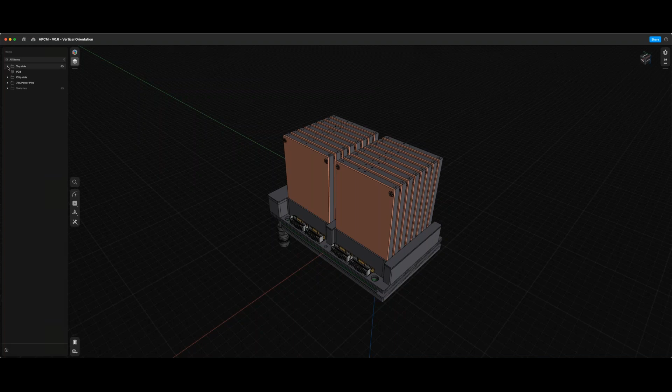So let me just make sure everybody can see this. You can see the model pretty much looks the same, with a couple of highlights on what we've done differently. We decided to increase the spacing between the drives, so we had a little bit more of a wall for the cooling, for the conduction cooled attachment of the drives to the water flow. So the module is now 118 millimeters wide, whereas it was 102.

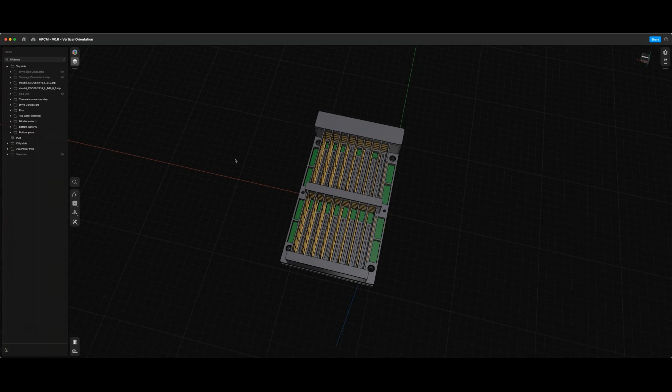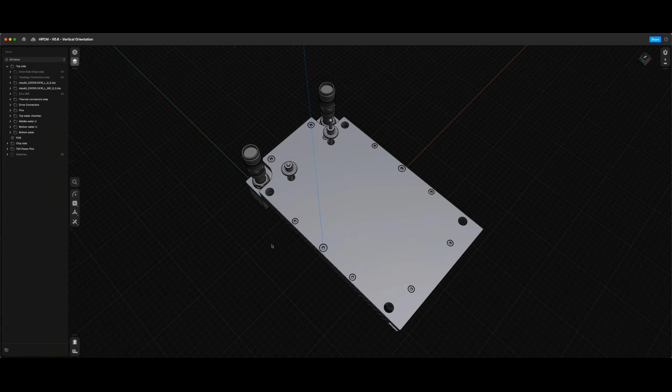The other key highlight, rotating around to the back side or component side, you can see that we've gone from 2 water inlets and 2 water outlets to just 1 inlet and 1 outlet. We've gone to the larger diameter Stäubli connectors, so we've actually got more area than the 2. We just took the decision to do that. Now what we've done is we've repositioned the power connectors to bring in the 48 volts. So all of this is still blind mate, and that's pretty much it.

We've completely designed the water flow for the entire module. This design has been geared up towards the work we were discussing with the research group from the University of Illinois, where they've done conformal coated copper on top of the module. We're going to investigate that with them, building a little research demo. And with Progress Analog, I don't think Roger's on today, but we're going to build the load slammer—a thermal test module based on the Xilinx VP1902.

We're also trying to involve UCLA and borrow one of their load slammer pieces of silicon. They can actually slam 1.5 amps per millimeter squared. So we can do the load slammer Progress Analog's traditional way with discrete power CMOS devices, but we're also looking at maybe trying to leverage some IP and devices from UCLA if possible. So that's the basics. The lid we've got here, designed for the conformal coating, could be modified for the more traditional thermal grease attached copper water cooled lids as well, but we'd have to redesign the lid. So we've based it on the assumption of a conformal coated board at the moment.

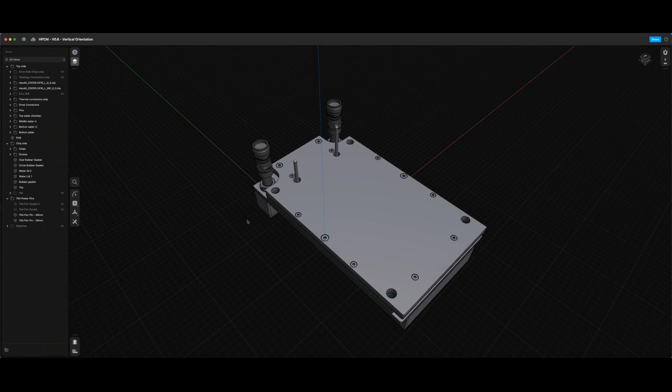Maybe Ben, would you like to just talk us through the water flow? Sort of coming in, going down the drives and up through. Just walk us through the flow. Yeah, for sure, I can do that.

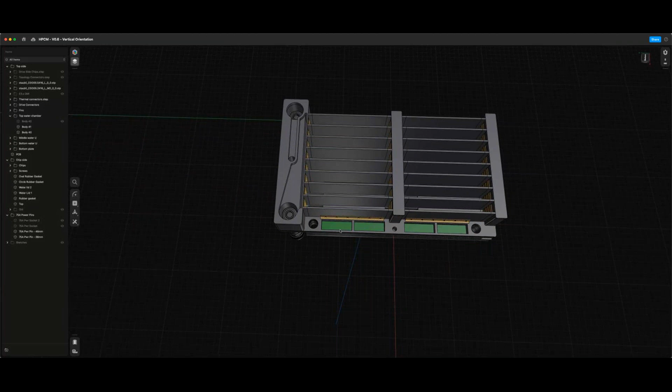So we start coming into this top chamber here on this left Stäubli, and I'll just pop open the top layers so you can see how it comes in. As it travels around, we've got these sort of raised areas. You see how the water comes down in between each drive, flowing between these three different pillars.

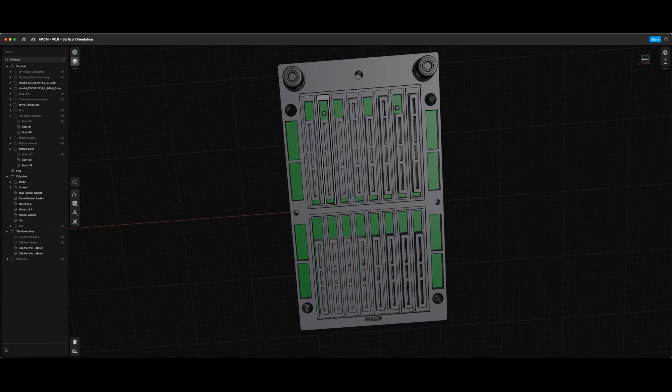With all 3 pillars on, we'll see that it comes down the sides of these walls, cooling the sides of the drives as it comes up, and then back up this area here, down the sides, and then back up again. I'll just pop these open so you can see inside.

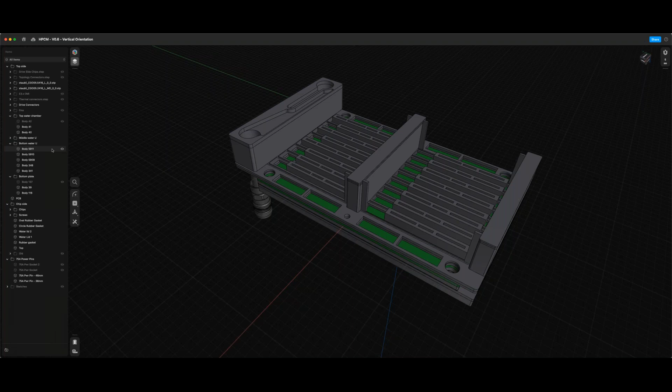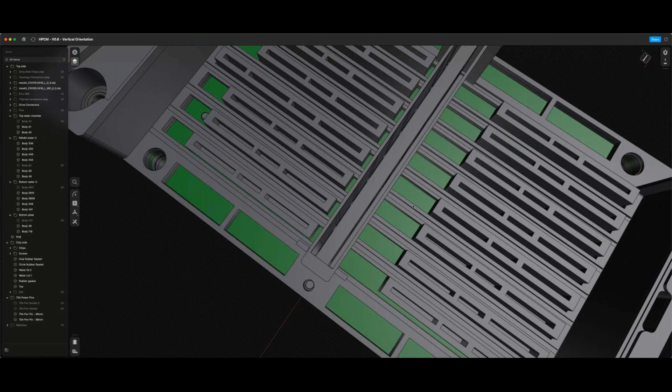So as you see, the water comes down through the Stolby, down here, and through the sides. After it makes its way through here, it comes down this center hole, slides around the PCB, and into our lower chamber.

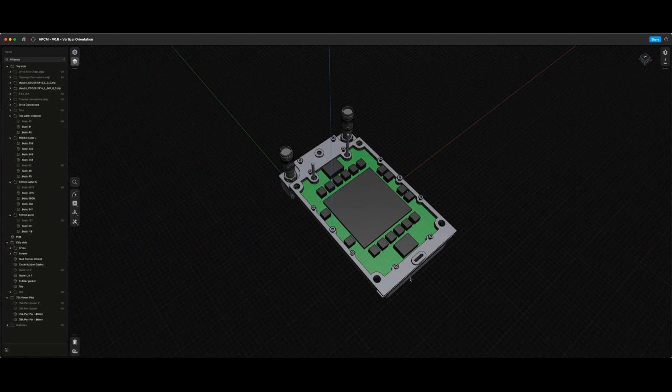Now I'll pop this bottom lid open, and we can see it comes to a full open sheet. Maybe it's easier if I show this. Sorry.

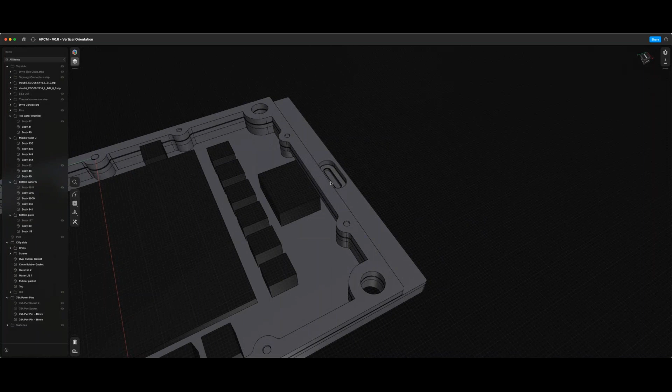I'll just remove everything and watch this plate from the other side. You can see the water comes in through this bottom chamber, through the pipe from the other side, and over all of the compound coating that my dad was talking about, then comes back up through the same hole in the side here to the other side and back to where the previous Stolbys were on the top side piece, coming up through here and through this exit Stolby.

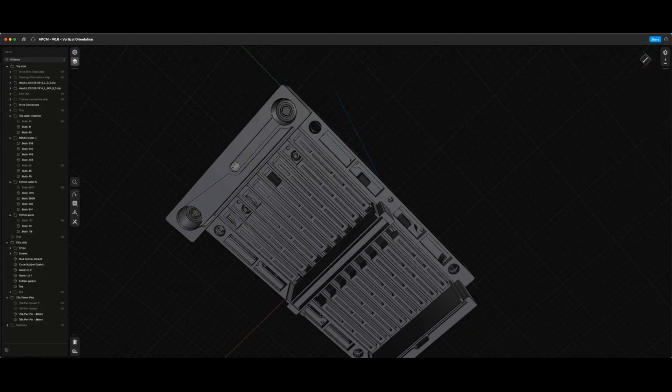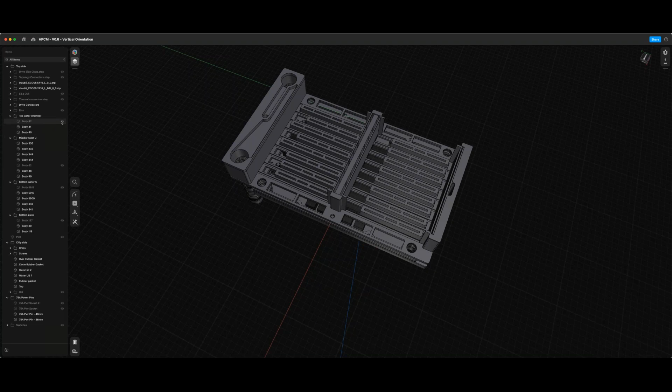Hi Ben, this is Munir. Is the water circulating? Is it an enclosed container or something? How are we avoiding water spilling out? Well, on this one, this is one solid block, so the manufacturability of this is going to be a big question.

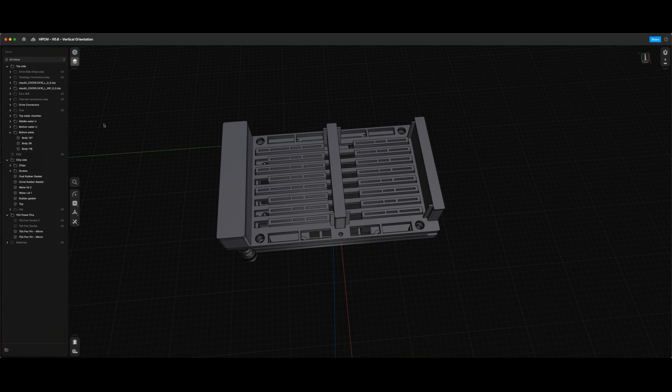So we've got the fundamental design, and we're just going to be reviewing that with one of my mechanical friends on the manufacturability. But I will talk about a company, a little startup called Fabricate that does 3D printing of heat sinks. I don't know if this is viable to be 3D printed. I know people have been concerned that 3D printing isn't a good way here.

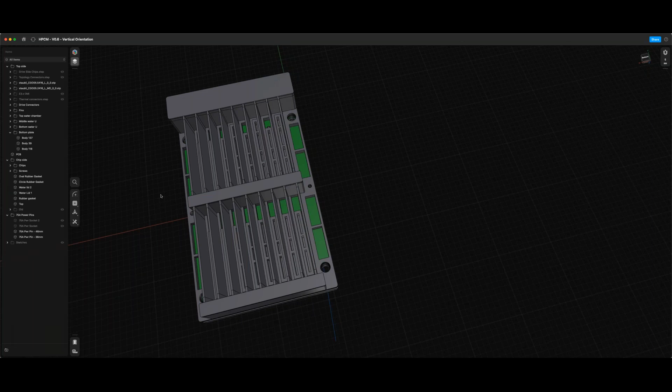But basically, there is a manufacturability question. We've tried to think about it, but this would be an enclosed unit on this side. And then Ben, just flip it over and show the connections. So these Stäubli connectors are blind mate, non-drip blind mate connectors, but the flow between the two modules.

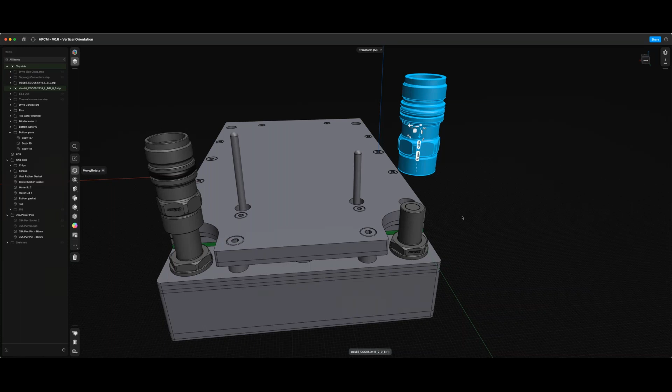So if you get rid of the top at the moment, Ben. This piece? Yeah, the entire top. The entire top. Wrong way around. Oh, okay.

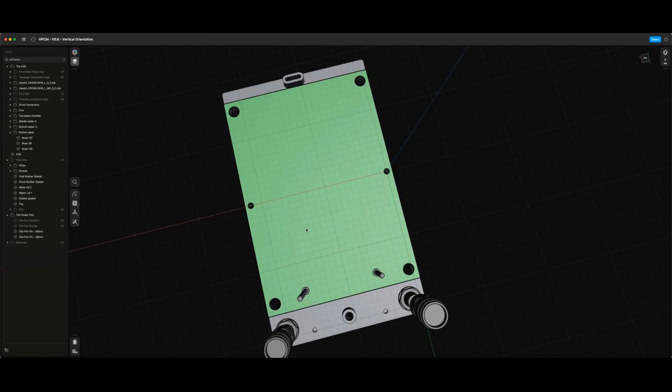Yeah, so what you can see, the water comes up to the module. So there's a rubber seal there as it mates and gets clamped to the top lid, and similarly a rubber seal on the other side. And then the top lid itself, if you do the main stiffening bar around the board first, Ben, before your rubber gasket. Yes.

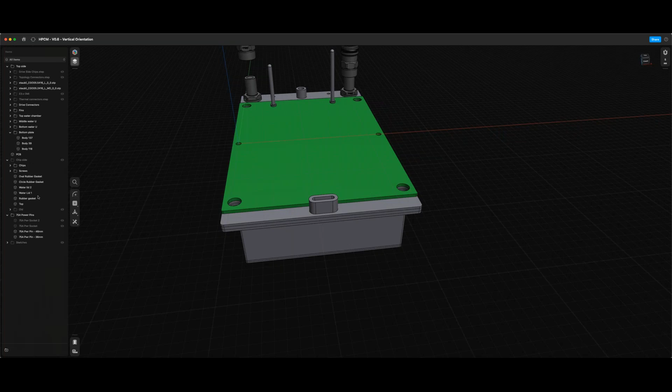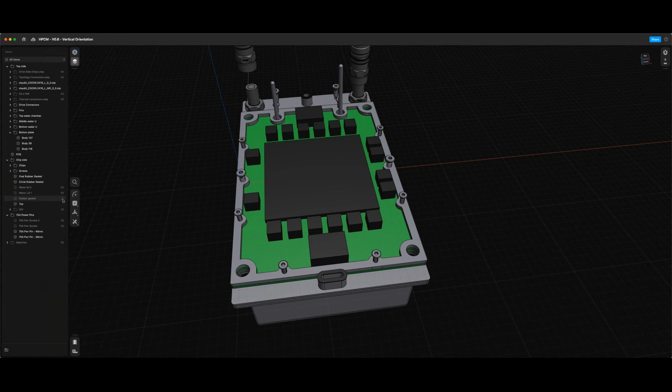So no problem, there we go. So I envisage that this will actually be attached and somehow sealed to the board, either epoxied or glued to the board, this stiffening frame, so that it's actually watertight. And then there's a rubber seal that goes on top of this, right, Ben? Yes, yeah, you should show that. Gaskets, yeah. And then a rubber gasket, and then there's a lid, and then all that gets clamped.

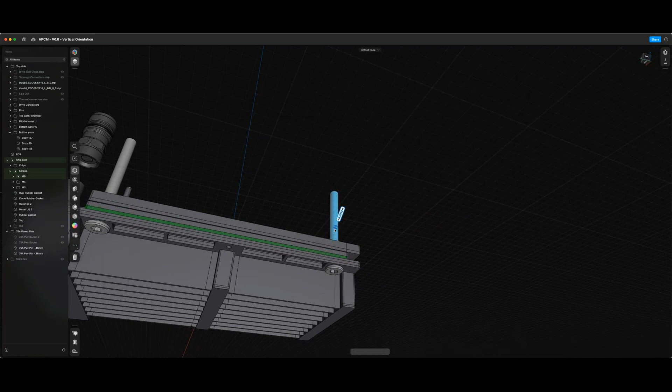And actually, you haven't shown the big corner clamp screws yet, so show the big corner clamp. Yeah, I can turn those on. It bolts these two pieces together effectively. So this bolts the two pieces together, and also this, you can see, they're long. There we go, they're long.

So these are also the primary guideposts to the wall, and we're going to start working on the wall design now. So these will be the guideposts into the wall, and there will be a hole all the way through these pillars so that we can actually screw it to the wall. It'll be a blind mate slide in, so it will sort of sit on the wall very nicely and simply, but the screws will just be there to hold the module in place on the wall after it's been mated.

Does that answer your question, Minner? Yeah, I think there are a couple of things that you may want to consider. Obviously, with 3D printing, we want thermally efficient material, right? So plastic may not work here. So you want some kind of material, aluminum, copper.

And the second thing that I have is in the design, because most of the heat, you're going to efficiently cool the connectors and all those things, right? But on the top side of the CPU and other things, it still needs to be addressed because that's what's going to generate the most heat, right? You want some kind of channels there, which essentially today we do.

Yeah, so yeah, absolutely. In terms of this conformal coating approach, it's research work that's been done at the University of Chicago, Illinois. Obviously, you can put a normal design. We could redesign this lid to be a normal type water chamber, which is thermal grease mounted onto the main device and gap padded onto the power supplies, etc., and the other hot devices. But we were just going to experiment because the University of Chicago has some research money.

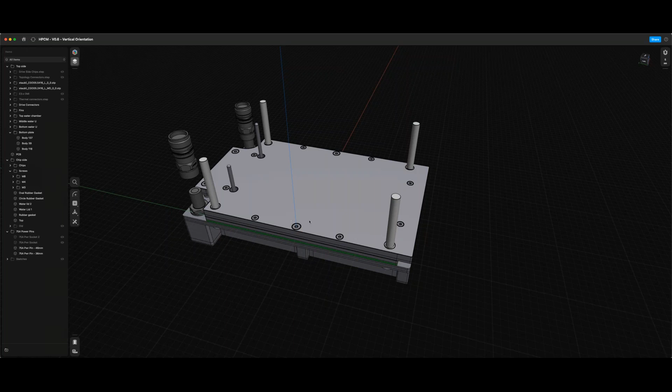So on this side, we've got the connectors. Can you turn the other connectors on, the topology connectors, Ben? Yeah, if you turn everything back on except for the modules at the moment.

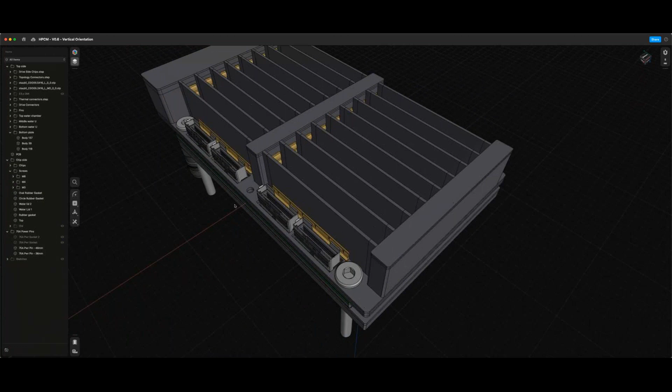In this particular setup, we've got these topology connectors. You've got 4 on each side, so 8 topology connectors total. The ones you're looking at right now, I believe, are MCIO connectors, PCIe Gen 5 by 8.

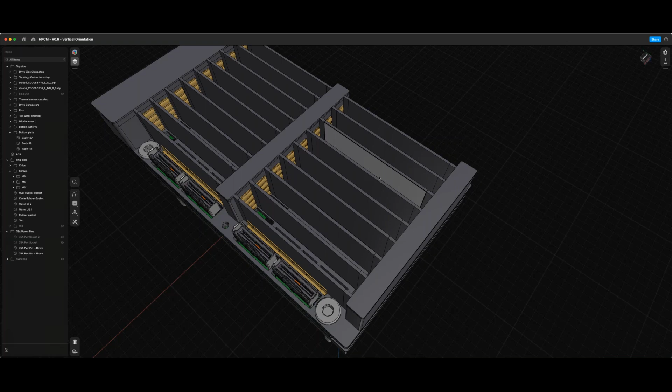We're also trying to cater with these water-cooled walls for actively cooled cables, so we can cool an electrical repeater inside the cable, or silicon photonics inside the cable as well, if we're down at relatively low wattage levels in the order of 5 watts or thereabouts.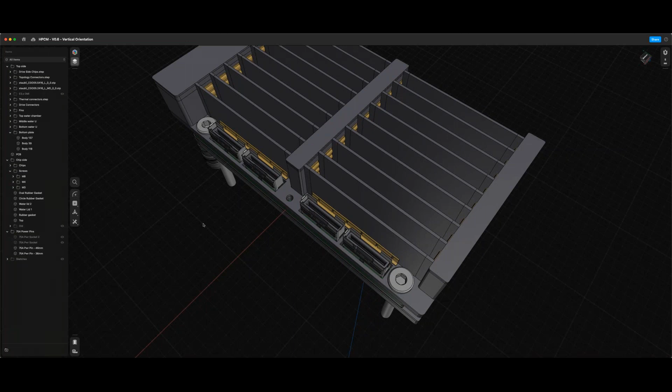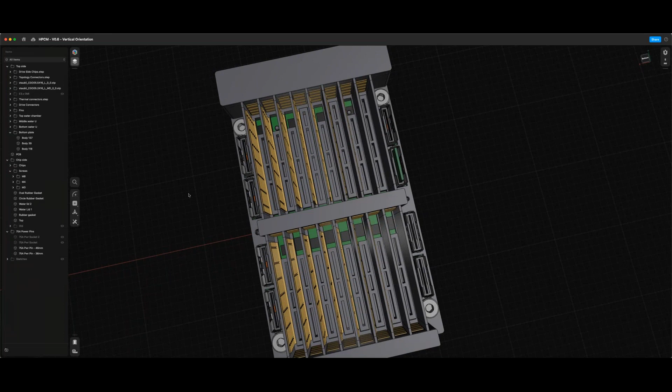So there are your topology connections, and then if you stare down into the middle of it, there's media connections. These are E3.S or the EDSFF standard modules. You can actually plug single width modules into here, so you can have up to 16 like CXL.mem devices.

But the beauty of this is companies like TE do make cables in this format as well, so you can actually cable out of this module. If you wanted Grace Hopper type bandwidth between two adjacent modules, you could use this media I/O, so you have the flexibility of closely coupled media or cabled I/O to other devices.

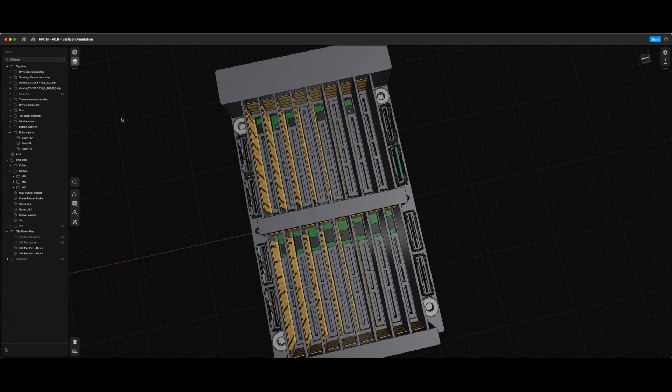Finally, we're showing on this again PCI connectors, but we could take something like Samtec's Accelerate connector and bring Ethernet out here. So you could bring 800 gig Ethernet out on these little connectors as well, or any custom topology, come to that. So that's the I/O portion.

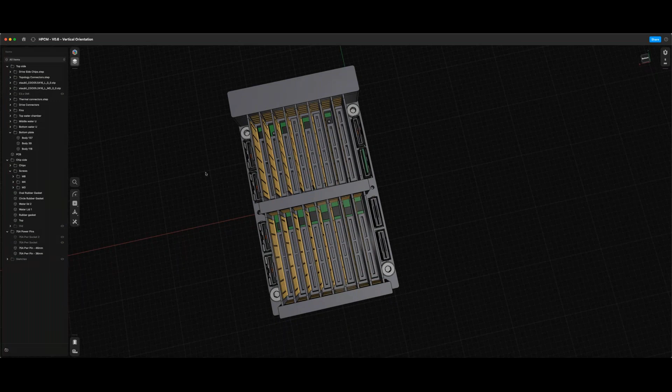So that's one of the things I've been a proponent of, conformal coating, but then everybody always throws in my face: well, what about the I/O, and how is that not going to get coated and seal off all the gold fingers on the connectors and everything?

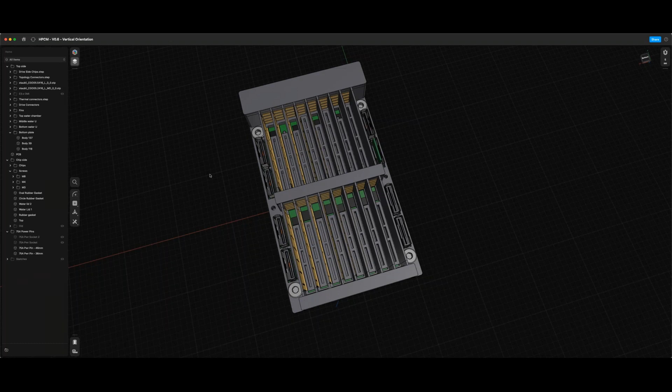Oh well, I'd love to be able to work with you, and actually we've got Intel's attention with Ayar Labs, your experiments with Ayar Labs. So maybe we can all talk on that side of things. That's another complication, I'm sure, with the optical I/O, but yeah, I'd love to work with you on that. I'm not sure how well you're plugged in with what's going on that side, but we'll cover that in a little bit later. Thank you.

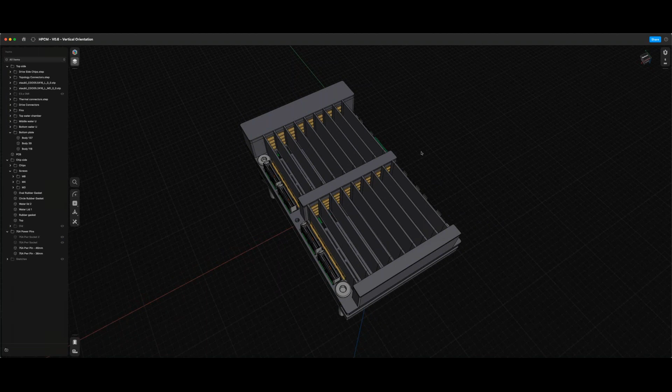Any other thing that we want to talk about, Ben? So the only other thing I would say we've done - you'll notice because we've put more spacing between the drives - we've managed to raise the walls that go against the front of the drives that pick up the thermal interface.

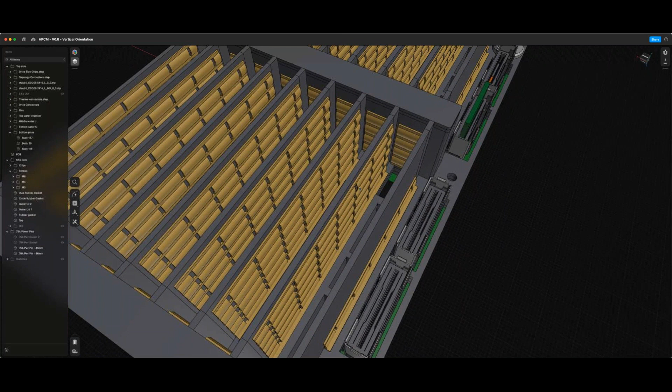So this is a biggie. Will this thermal interface be efficient? We'd love one of the connector companies - hint, Samtec, etc. - that we want to make some sort of thermal connection between the modules and the copper here and the water that's flowing through it to pull the heat out of the modules.

Ideally, a single width module has a maximum power of 25 watts, but double width modules are in the region of 40 watts, I think, as a maximum. Typically air cooled is mainly fins, but we're wondering if we can make a double width module still single width and cool 40 watts with this here.

So the thermal modeling needs to be extended, but hopefully we've made this design a little bit better with a thermal interface between the two, so when you slide the module in. So this is completely unproven - this is a concept at the moment, and it needs thermal modeling.

Ender, from Turkey, has been working on the model, so I need to resync with him on this latest update.

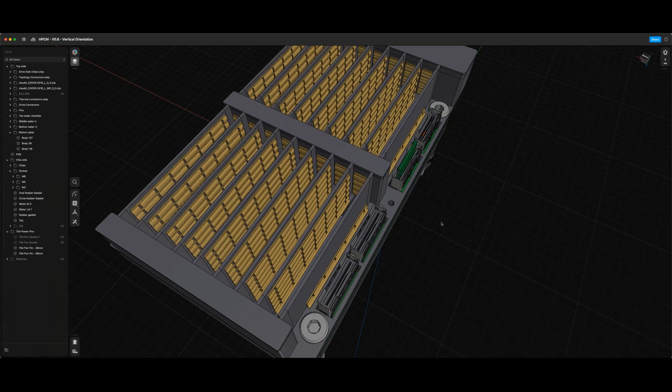I think that's everything. I'm a lot happier that we've got a base design. Now we've got to work out if it's manufacturable and at what cost - that's the next thing.

Another requirement challenge to throw in there is how many times do you want to remove and install those connectors that are going to interface with the thermal interface material, and do you have to change that thermal interface material out every time you change out a module? Like, where does that reside?

So these are like connector springs, so like beryllium or whatever it is they make connector springs out of.

I'm assuming we'll be able to get away with some insertions. We were thinking that maybe there could be some level of gap pad underneath the two. But the compression of that gap pad, if you did multiple ones, I'm sure could be a problem. I guess primarily once you set this up,

So we've got Alan, the robotics guy. One of the things with this wall of compute is that these modules could be serviceable by a robot. You'd have a gantry robot in the aisle by the wall, and it'd be able to potentially service the cabling, potentially service the module replacement, and even potentially service replacing the entire module.

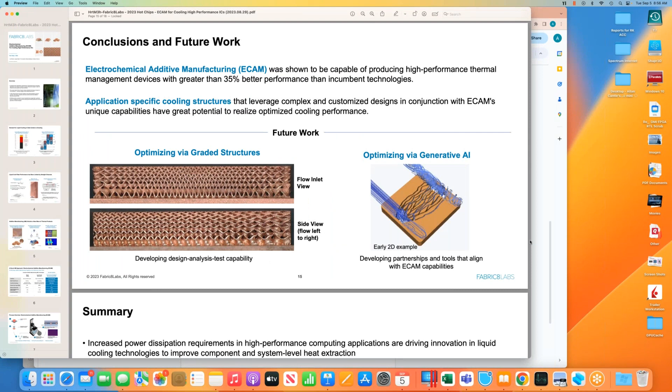And finally, Fabric8. Unfortunately, I had to leave before Fabric8 presented because I had to catch my plane. But these are the 3D printing guys. So I'm interested to talk to these guys. They're a startup, so I don't know really how real this is at the moment. But basically, they're showing some very fine geometry features of how they can improve the liquid transfer in terms of thermal management. So you can see these are small featured devices with these fins on, and whether you can conformally print this type of stuff, or how we do this.

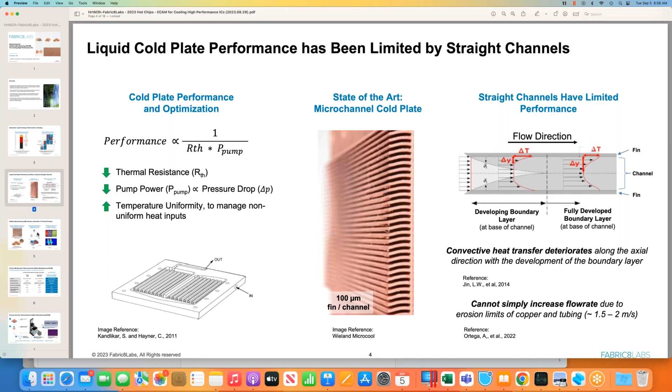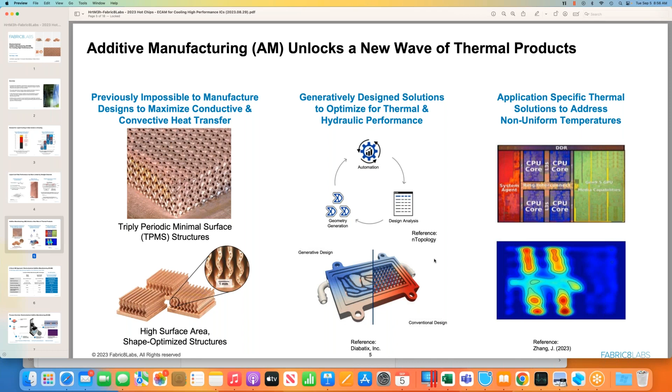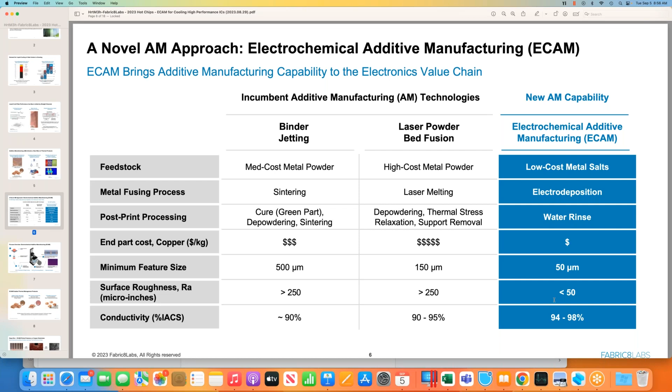These guys are based in San Diego. There's a heat sink, you can see there, with a 100 micron gap on the fins and water going through the middle of the fins as well. Again, I didn't see the presentation. Hopefully I'll be able to get the recording shortly. They're claiming it's low cost compared to other approaches, the way they've done it.

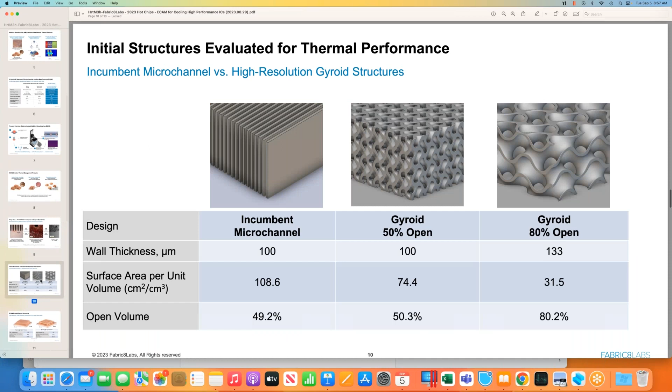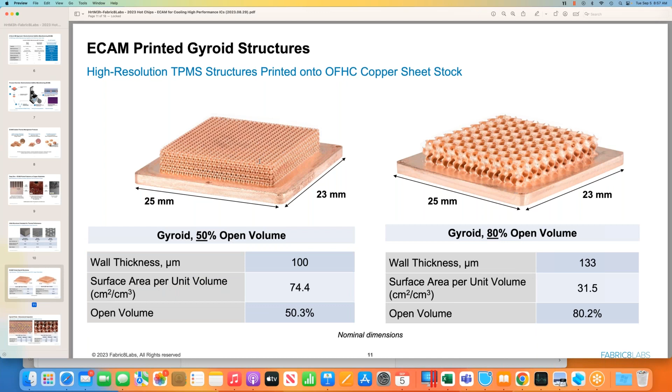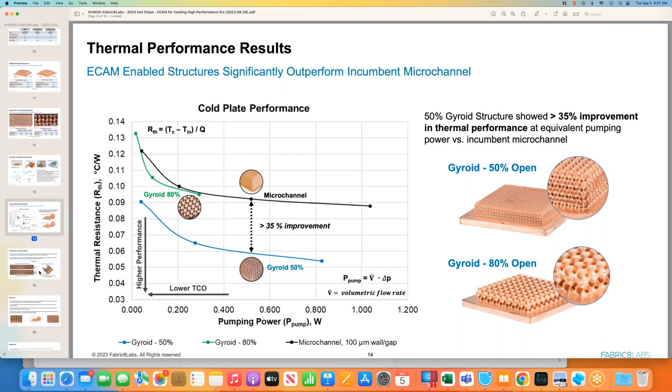Honestly, I would think there are better ways of doing it, not least because 3D printing on that scale is as slow as old boots. Trust me, I'm doing a load of it at the moment, and it is as slow as old boots. Yeah, no, fair point. I mean the cost of all this. Yeah, so like I say, this is an interesting area. How we manufacture it. I think you might have joined too late, but Ben was showing the modeling, and how we manufacture the dry side heatsink with all the water channels is going to be interesting. We're going to review that with my mechanical friend this week sometime, hopefully.

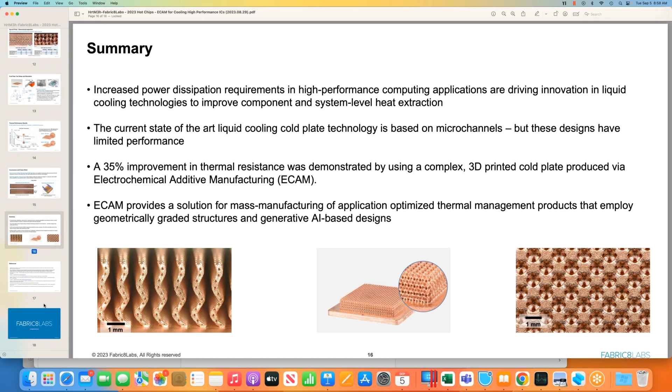So that's about it for the conferences. So lots going on. I'm hugely encouraged, especially with this new emergency act of the government saying we need to onshore. It's a national emergency in terms of the entire world is run by technology, and we've got to make sure we can do everything onshore here in the US. And I think that just bodes well for what we're trying to do, which is bringing this to an open ecosystem, which the government are really keen to do, rather than just the very vertically stovepiped incumbents. I think we will get HPCM into DoD within 2 years if we can get our ducks in a row. There's a lot of demand there, all over the place.

Actually, on that note, are you able to give any more details on your little brief, just last minute? Are there any more announcements you can make? Well, basically, it's all happening. We're really looking forward to being able to kick this off. We're keen to get it kicked off in the next month. All the stars are aligning to make it happen. So let's go do it.

Okay, great. Just to close out, in terms of upcoming, I've got this upcoming Syracuse Research Center meeting. Hopefully I'll be able to fold in a visit to Washington at the same time, but at the moment that's not looking as though it's going to happen. OCP Global Summit, I've prepared some basic slides for that. No time to show you them, but essentially I'm just giving a very high level overview of what we're up to, so people can understand without getting into the weeds. The principles, the sustainability, the domain specific architectures, etc. And I will be attending Supercomputing, not doing anything specific there, but talking to people.